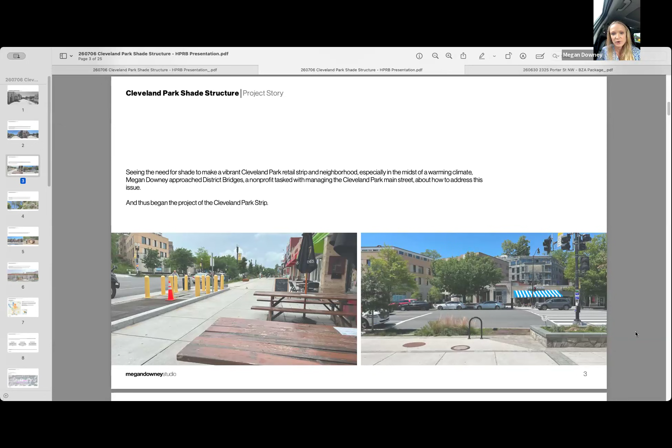So noticing that, we approached District Bridges, who runs the Main Street program for Cleveland Park, and brought up this issue with them. This began the project for the Cleveland Park shade structure. Trenton and I have been working on designs, talking to HPRB, and working with District Bridges — we've been through a number of rounds to come up with some designs.

While we were working on this project, we were introduced to two very large heritage tulip poplar trees. Tulip poplar is kind of a staple of Cleveland Park, those really tall trees you see in the distance. These two trees had been around even before the neighborhood began, before all these homes were here. They were marked as heritage trees and needed to come down. So we had these massive trees, and the question was, what do you do with this beautiful wood that's been in the community longer than we've all been here?

We were introduced to these trees and thought, why not marry these two concepts? Take this wood that's in the community and turn it so it can continue to shade the community. We came up with a system of taking louvers from this tulip poplar tree, creating louvers and cables that undulate over the strip to create a beautiful organic canopy, not too dissimilar from a tree itself, but one that can continue to shade and provide interesting, cool space for Cleveland Park.

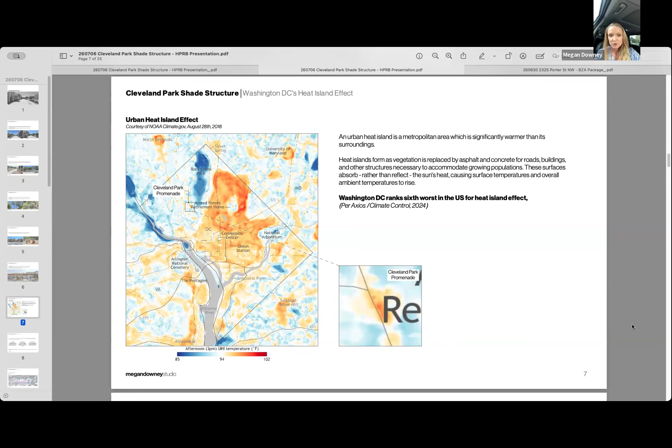That's something we're trying to combat by using these organic materials, which you'll see throughout in the green, shown later in the presentation.

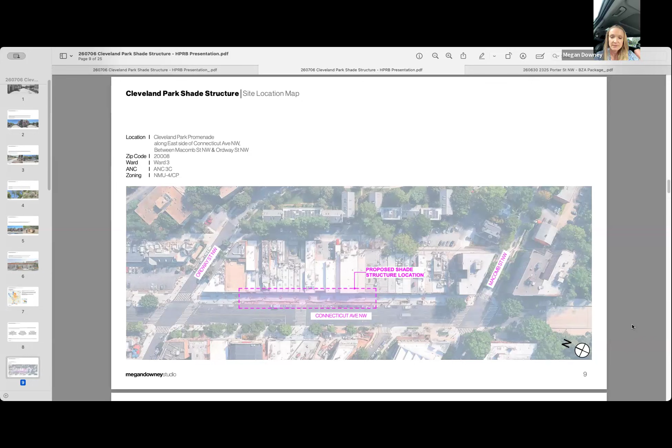Looking at the map, here's the whole promenade going from Macomb Street at the very bottom all the way to Ordway Street. The outline is the extent of what we're doing for shade, where the shade structure would be. In the blow-up map, you can see there's the intersection that crosses the street, so we're really looking at doing it on either side of that intersection.

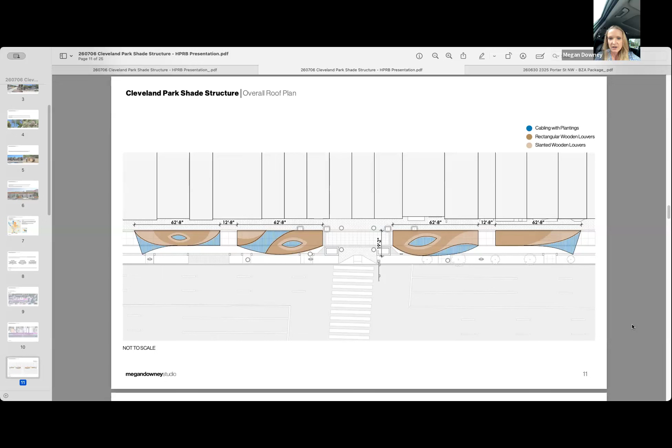Now as we get into plans, you can see the undulations - it's probably best to go along into the plans. Here on either side, it's this very organic undulation shape, a system of wood louvers and cables.

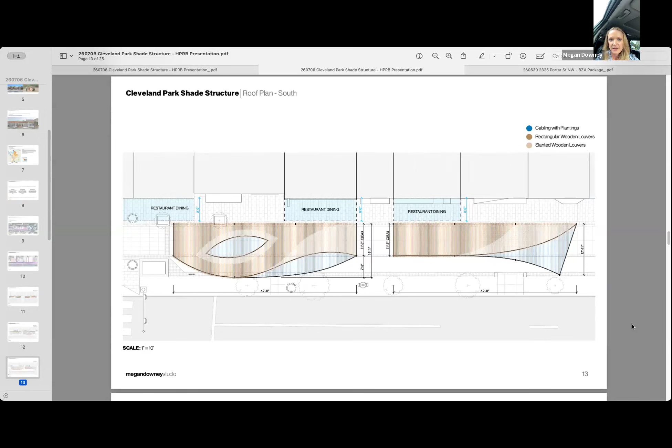The key takeaway as we think about a shade structure is that we have to be really cognizant of where there's already striping, where the walkway has been identified, where the seating has been identified. We had to be smart about where we put the poles. The majority of the poles are in these small granite strips, which leaves that 8-foot clear walkway space open and unencumbered.

On either side, we're putting a series of benches that are part bench, part planter. That allows some green to grow up, because part of our system is wood louvers with cables in between. That green grows up and continues to provide shading. This frontage is western facing, so it gets great sunlight, which is what's contributing to the heat here, and that really helps these plants grow and thrive. This is a perfect place for this type of greenery.

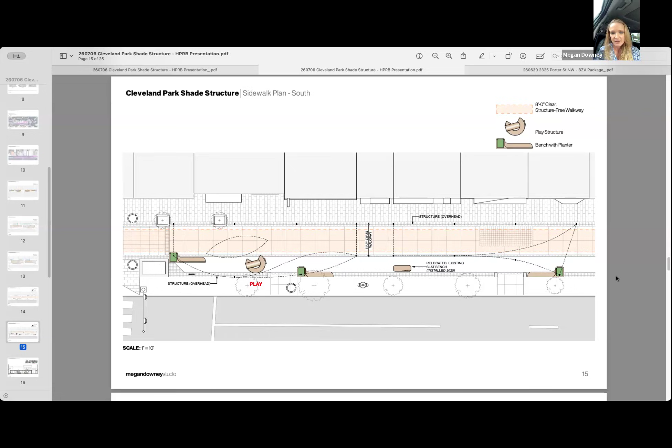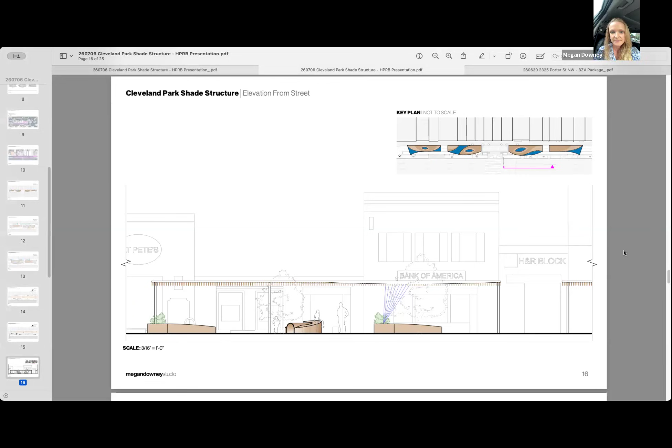Here's more elevations, and I think it's very impactful as you move through. So again, you see the rendering - that's from looking at Connecticut, what you'd see from the streetscape. You can see how these louvers undulate and become cables, moving up and down the Cleveland Park corridor.

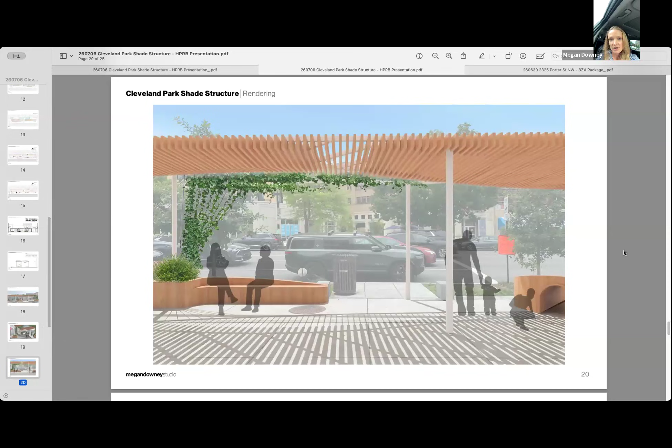This is a view of standing underneath the shade structure and looking down at how people are in it - it's a cozy, comfortable space. You get beautiful light patterns as the light filters through the wooden louvers onto the ground, becoming a really beautiful space while filtering the light. Then a view from one end of the shade structure as you move through it.

As we think about materials, that top picture is the tulip poplar. What we're looking at doing is taking heritage tulip poplar that comes from Cleveland Park, our own neighborhood, and sending it to a kiln at a place in Baltimore - so it's hyper local, very close. We're thermally modifying it, which allows it to be used for outdoor use. That's the top image.

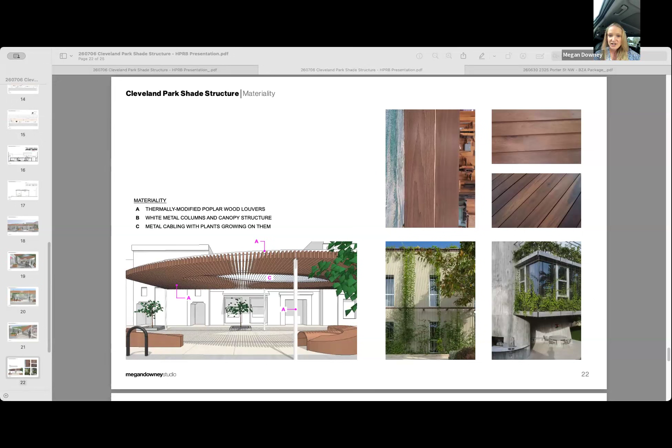In the bottom image, you're seeing cables, because what we're doing is a system of wood louvers and cables, and the cables allow that greenery. So instead of doing green roofs, that's how we're getting that greenery into the shade structure. Here's some images for inspiration - not quite the same, but similar.

Finally, the other thing we're starting to think about is signage - some comments have been about visibility, and people are worried about that. I think there are ways we can think about it and still have shade. We could do signage on the post or in the planters in front, but there are certainly ways we're able to bring more visibility to the businesses.

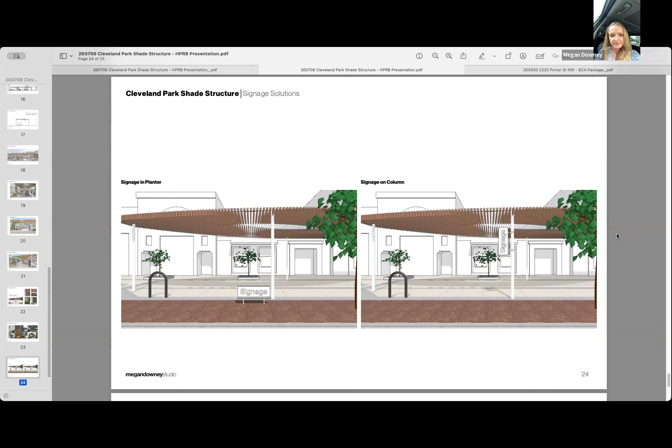And the vegetation, have you already identified what that might be, or is that speculative? It's extremely speculative. I think the next round is we'd actually want to sit down and talk to somebody more well-versed in native plants. But the idea is that it's something able to grow up a cable quite easily, a growing vine. So I don't exactly know what type, or even types if we'd have more than one, but that would be the next round.

Well, thanks again. Yeah, thank you.

Oh, I did remember my question. So Mac, I apologize before I forget it again. It would be helpful if in that Main Street survey, if they had the numbers, which I feel like I responded to, and it did ask how you get to this strip, if you're walking or driving.

I don't know that many cars are using the freeway or Connecticut Avenue and just stopping randomly. I think the numbers show that most people who go to that strip are walking there, whether by bus, metro, or just walking from the neighborhood, as opposed to through-traveling and making split second decisions about shopping there. So if that number exists, it would be good to include in this.

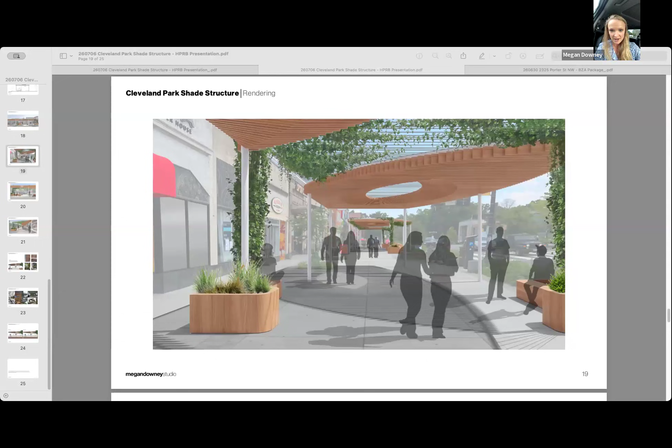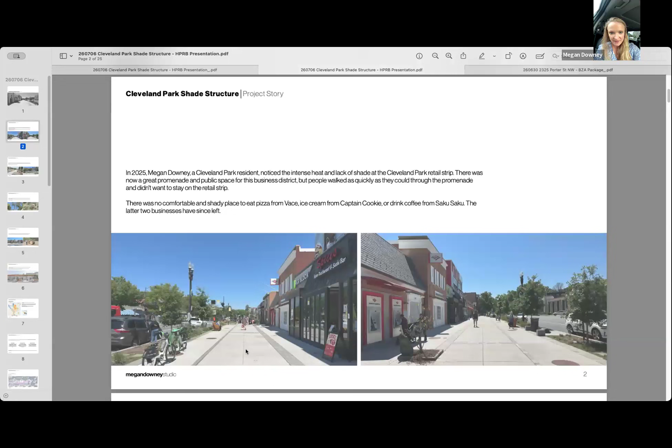No, it has not, and actually that became part of the difficulty in designing this - we had to be very careful about where those poles come down. As I mentioned in the plan, we tried to keep those poles in the granite. When you go out into the strip, there's a granite lining on either side of that area that has been filled in. So the majority of the poles come in there, or we tried to have them at the edge, where the green strip is, where you see the bicycles. There's another granite strip that's aligning the plants - that's where I'd say maybe all except one pole is.

So the thought is that vendors and these markets would still go on, but they just maybe wouldn't need the tents. And the height thing is a really delicate balance, because we're trying to deal with visibility for the businesses - if it's too high, there's a concern that the businesses can't be seen from the road. So it's a balance we've been working on, talking with HPO and District Bridges.

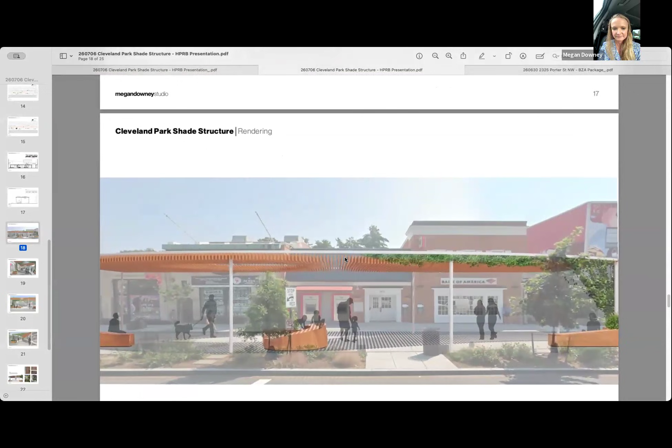Brilliant, thank you. I just want to note for everyone that District Bridges is a contractor that has the grant for the Main Streets program, and that contract goes up for renewal every few years. So it might not always be District Bridges in charge of the Cleveland Park Main Street, technically, but important to note. Bob, you're up.

Thanks, I really love the concept. It looks great, it's definitely addressing a need. And my questions were more along the lines of what Mac was just asking about.

Maintenance - didn't know if you had, like, the kiln dried poplar, what's the life expectancy of that in an outdoor setting, kind of treatments - when's the, how do you replace the louvers, and just that whole concept of longevity, if there's going to be a plan for that, which sounds like you're working on, but that was my question.

Yes, as I read it, I 100% want to think through maintenance with this. And to answer your question on longevity, we're working through that. I will say that thermally modified poplar can be used - it is often used for pergolas, so it's not a new use of this material in this way.

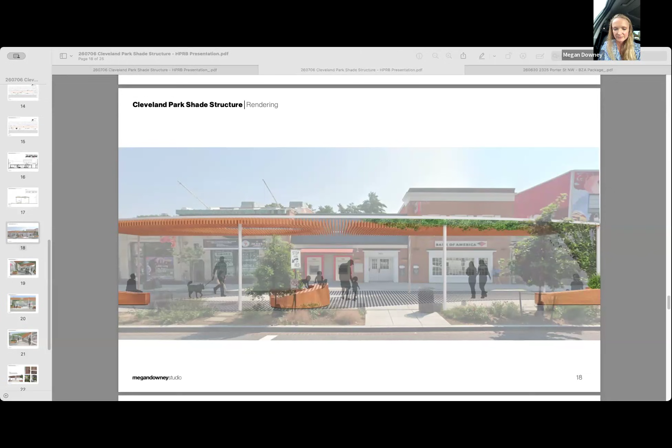And then the other question was just relating to the concept. I'm curious because this obviously doesn't span the whole promenade. If you looked at or considered concepts where instead of a big structure over the whole thing, you looked at — and this is broken into segments — did you look at individual segments where maybe each shade part is considered a tree?

And then relating to the winter thing, and as the trees go, relates to that, did you consider options where maybe there's canvas put up in the summer that sails over the promenade, and those could be taken down in the winter? Maybe it's like, I think the historic stuff is obviously forthcoming, but there's some part with historic preservation where if something is reversible or temporary, it's considered more appropriate. So I'm curious if you thought about those, or if those are backup plans depending on what HPRB says.

Well, we didn't really look at the sails because in my opinion, I think it should be a little bit of a permanent structure. And also, we liked the use of the organic material. I think there's something really poetic about something that was the original shader of Cleveland Park continuing to shade, right? There's a really great story, and that's really beautiful there.

So no, we didn't — I mean, we've looked at a lot of different iterations. I think we ended up, because the big challenge, as I mentioned, is really about where the poles can go. So even with the tree thought, you have one pole, you can't be in the center, right? So you got to branch over, come down on either side of that 8-foot corridor. And then we thought that one big system was going to be too much, that it would overpower — that's why we ended up breaking it into these smaller sections.

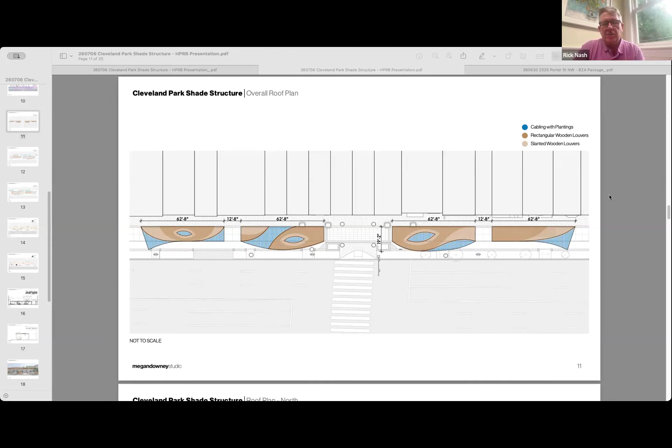At this point, what are you thinking the height of the pole structure and the horizontal structure is going to be? And then the cables are above that, is that correct? No, the cables are in the same plane as the wood. So right now we have wood louvers that are 8 inches high, with a metal system above holding those 8-inch louvers. You can see in elevation what that looks like. Currently we have about 9'6" to the underside of the louvers, and then the structure above that.

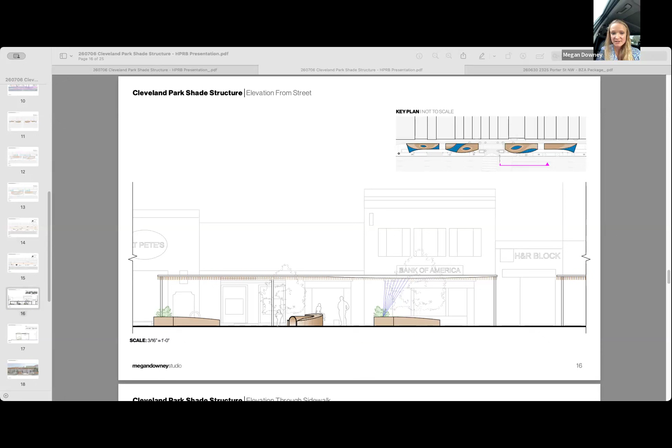I guess, Rick, I would say I'm on the same team of trying to bring more people to the businesses — I think that's the number one thing. As someone who lives in this community and wants the businesses to thrive and stay, I would argue there are other ways to solve that visibility problem. You can see on one of the end slides that by putting signs on the street, on the poles, there are a lot of great ways to bring visibility. And lastly, I would even argue that having a shade system is in and of itself a way to bring people here.

So I think that there are all these ways that are going to fortify our businesses and really help them stay, not leave. I mean, of course, signs on poles and things create a challenge for the other thing that HPO will look at, which is, does the structure obscure the facades of buildings, which for contributing structures is going to be a concern of theirs.

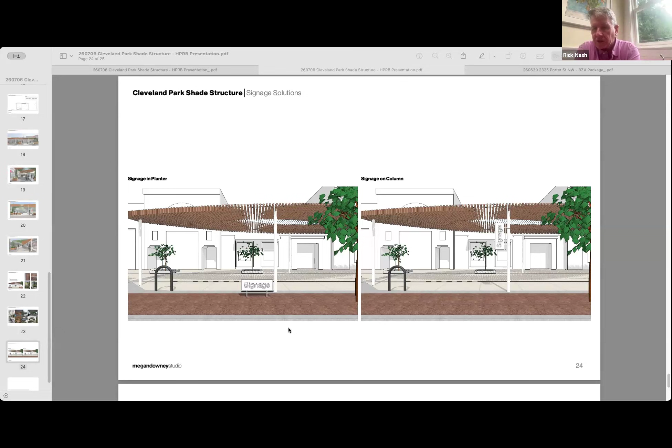The other is, I noticed that you had some examples of similar kinds of structures that show what's possible from an engineering and design standpoint. Which of these, are there examples where they have been built in public space? Because what I'm struggling with is, who's going to own the structure? Is it DDOT? Is it going to be a community-based organization?

And I know you're raising a lot of money, but I would think you would want to raise enough so that there is a stream of funding available for maintenance, so that you're not having to raise it year over year, because maintaining a structure like this is challenging in the best of circumstances. In public space, especially DC public space, I could see where this becomes a maintenance and logistical nightmare. That has to be thought through, as I'm sure you've started to do.

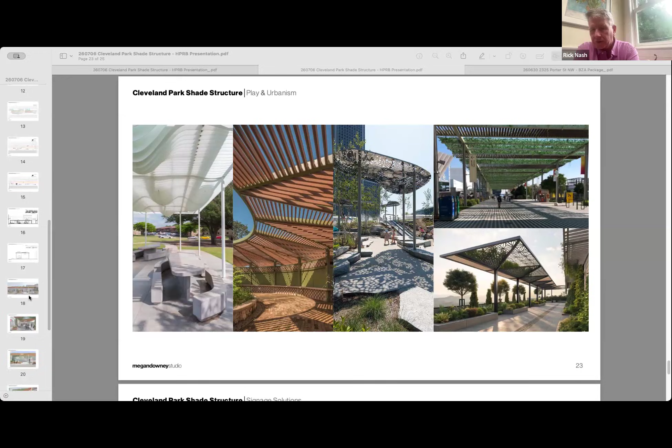Yep, you're correct. And then just lastly, on the plan, it was unclear to me whether any trees that are there now would have to be removed as a result of your plans, because I think what we want to do is everything we can to encourage a tree canopy to grow too, because that first and foremost is what we need. And that, together with something historically compatible and well designed, would only add shade to this area.

We want our trees to grow, right? So we are not proposing removing any trees, and we hope that they continue to grow next to the shade structure. And maybe someday they're so big we won't need this. Okay, thanks. I know others have questions.

John. Thanks. Great presentation, very interesting and creative. The issue I wanted to talk about has been flagged by Janelle and probed a bit by Rick, but this is a big project, a big deal for the neighborhood. It's got to last. Your District Bridges is great, but they might not be here next year or the year after. So part of your plan, part of your pitch to the community and to the DC government to get the blessing to do this, has to be a plan to make this continue to work in the future. And I haven't heard that tonight, but this is way early for me to expect to have heard that.

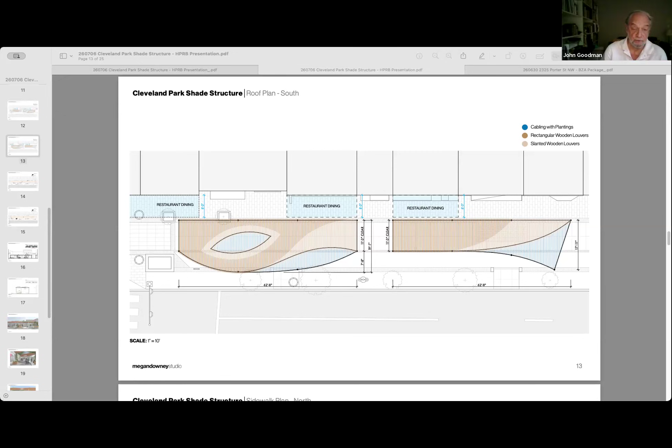But I just urge you to get that into your thinking and to make that part of your presentation as you go forward. Yep. Thank you, John.

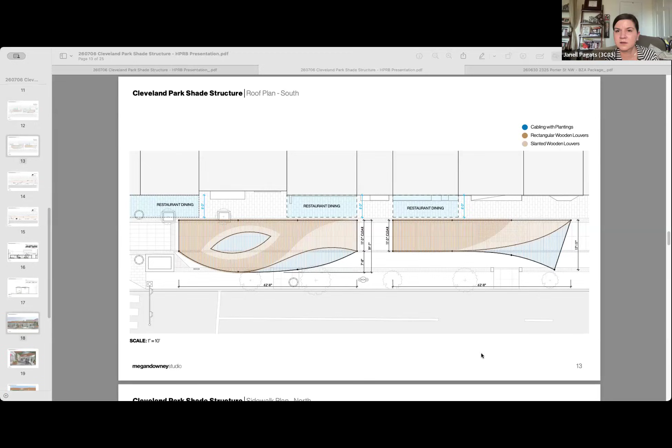Okay, can you hear me? Yep. Okay, this is great. This is the first time I've had the pleasure and privilege of hearing you.

Okay, I'm curious about sculpture in that space. You don't want to overcrowd it. Do I see benches there, places to sit? And also, again, you can't throw everything there, but any place for community drawings or kids doing something creative? There are always vulnerabilities to people deciding that their little mark needs to be there. So maybe having something structured for them to do that might work. So, what are your thoughts on these questions?

Well, yes. So right now we are proposing more benches than even what is currently there. We are proposing that we do some kind of play structure. I would love to get help with programming if that's what you're proposing. But I think that if District Bridges or somebody else wants to get behind the programming, that's only going to help bring people there and make Cleveland Park a more viably interesting and vibrant place.

I didn't mean program as such, although that's interesting. I meant a space where younger kids seeing all this space—I don't know, a whiteboard or something—but that would have to be watched and erased. Because spaces are vulnerable these days to graffiti, and I'm thinking of ways to prevent that or give options.

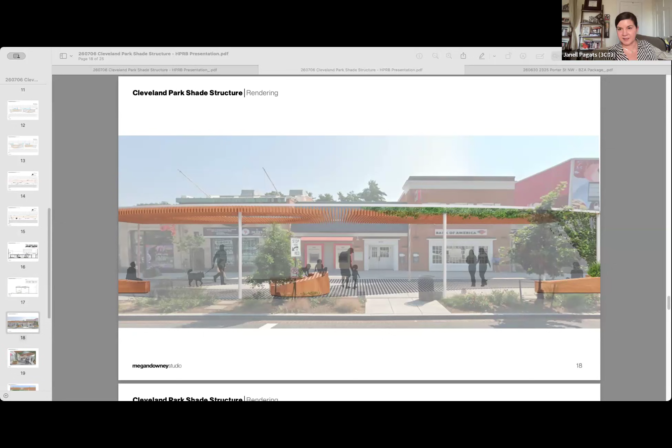As a reminder to folks, please send comments and thoughts to 3c@anc.dc.gov. To those of you who already have, I've read every single one of those emails. Trust me, if we could get these trees to grow faster and or have more of them, that would be ideal. However, there's that. Know that we're reading all these comments and taking this input.

We'll look for where this lands, if at all, on our agenda for our meeting on the 20th. It's unsure if it will be on there or if we'll ask HPRB to move this to a September meeting where we have more time to collect our thoughts on it.

Also, the public can comment to HPRB at any point in time. This is in the record, in the file. Let me just get that link real fast. And then we're going to move on to our next case, I swear. So many alerts.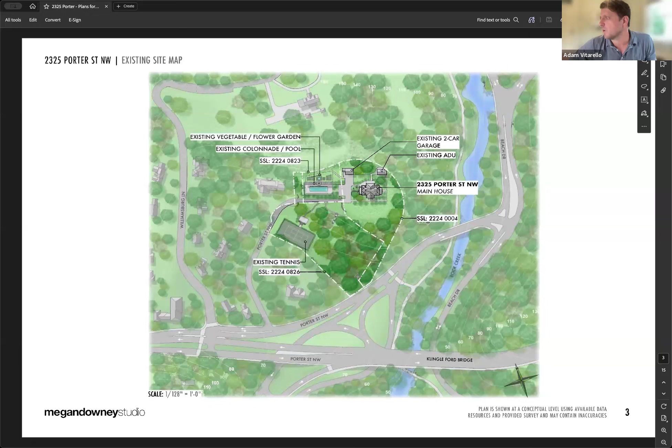It's got this historic colonnade, which is pretty cool, dating back to the same 1913 date. They put a pool in there in the 90s, I believe. Then there's a historic walkway down to a tennis court that's been there a long time, an original garage on the left, and an artist studio they built around 2000. So it's a big property for sure.

And just to give you guys some scope, folks that live near there will see these. It's really magical, it's a magical little neighborhood.

It's a magical property, with this long driveway up. That's the tennis court down there. It's got this garden we're hoping to turn into a community garden. It's got this pool, I think 63 feet, that we're going to basically keep as is, maybe extend it slightly to turn into a lap pool.

So what we're planning on doing is keeping essentially the same layout as it is now, not too many big changes, because it honestly is a one of a kind spot. We'll keep the house as is to be the main house, and keep the pool location as is, maybe extending it slightly to make it a 75-foot lap pool versus the 63.

By the way, all the decisions we make as it relates to design are going to go through HPO and through CFA. Right now we're talking about just changing the use from a single family home into this kind of community center. The pool house, the gym will be like a pool house. The artist studio will probably be a gym or yoga, maybe some classes. The tennis court will stay there.

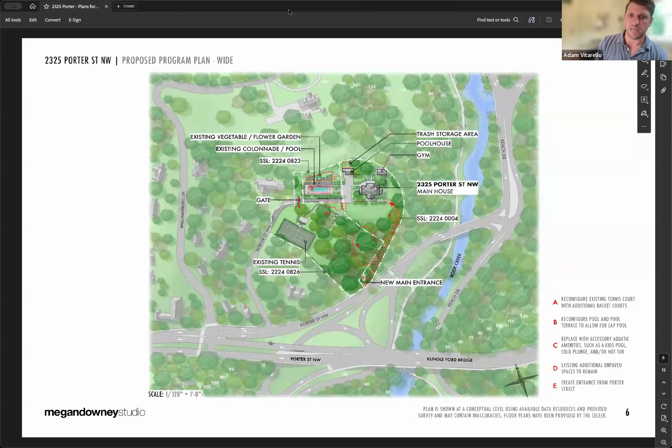And we also don't want a lot of cars, right? We'll have kids running around, so we want to keep it generally car-free. Even the owners of the property, of which there are 21 families, and I'm the managing member, while we have the right to do it because we own it, we're essentially going to forego that as well. Most of those folks are in Cleveland Park and Mount Pleasant and want to get there through biking, and I know we have some on the call as well.

It's very accessible, certainly from a bike standpoint. At the bottom there is the Klingle Valley Trail, so you can bike down Klingle Valley and pop right in, or walk. You can also take a bus, or walk about half a mile from Cleveland Park Metro, under 10 minutes. So it's a very, very accessible area.

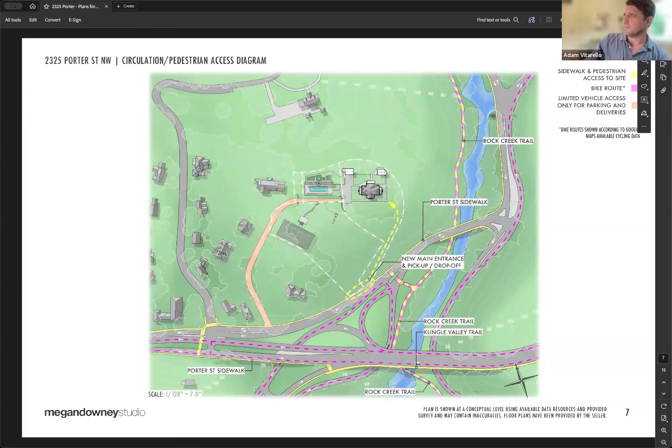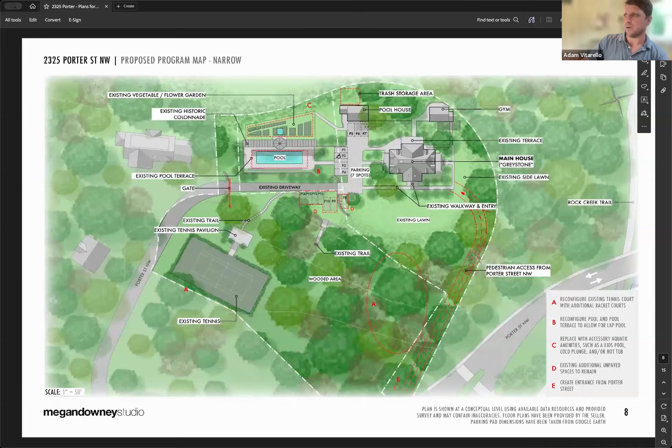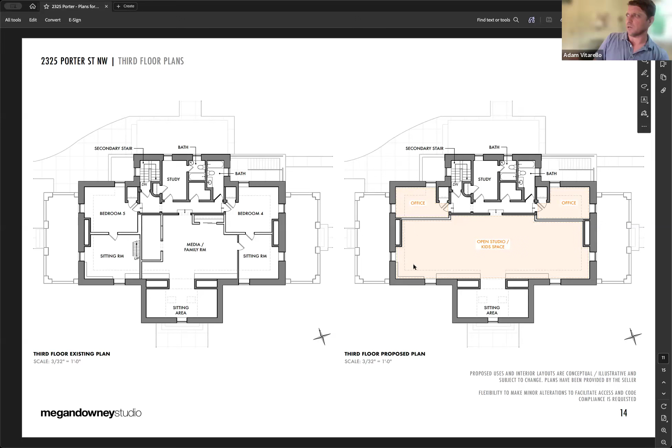So if folks have been to the JCC, there's like a big romp room — just a place for kids to go when the weather isn't great, or if it's too hot or cold out. Then in the basement, you could have some locker rooms, mechanical space, and a little gym and pool house. So yeah, it's right by Rock Creek Park, and we have a whole survey too.